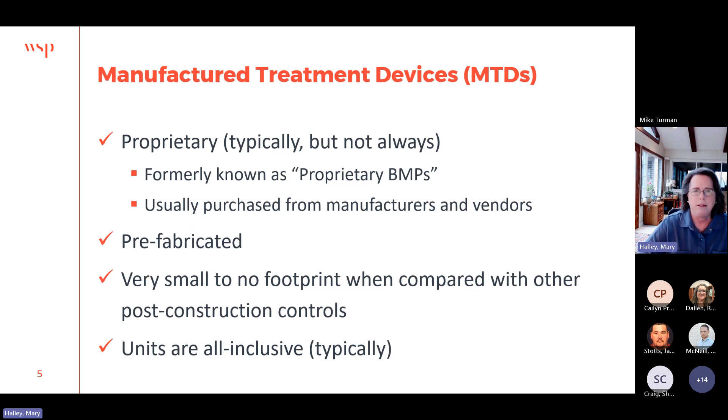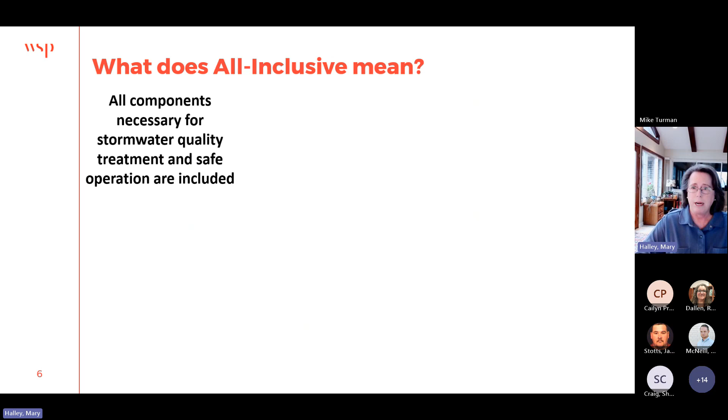These devices are all inclusive typically, and I'll show you what that means. All inclusive, I've defined as all the components necessary for stormwater quality treatment and safe operation of the device are included. Some also do flood control, though not many. But when I mean all inclusive, I mean they have everything for stormwater quality treatment and for safe operation, so they're not going to flood out a space. Safe operation means they can handle the drainage they'll encounter, and they send drainage they can't deal with off safely.

Okay, so when we think about this—excuse my dog if you hear her barking. I work from my house and someone must have come to the door.

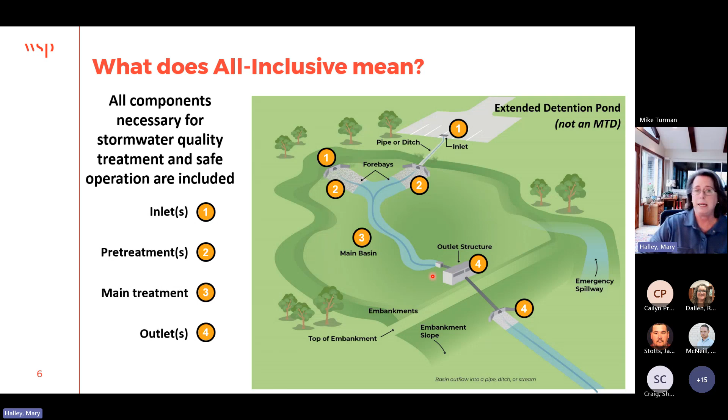For safe operation, we need an outlet structure that discharges the water that's come into the basin in a designed and understandable flow. We also have an overflow—in this case an emergency spillway to the right, where if this basin fills up and we have a deluge, it's not going to spill over everywhere and flood out the property. The spillage goes through a designed emergency spillway and can head out of the basin safely. So that is an all-inclusive practice: inlets, pretreatment, main treatment, outlets, and overflow.

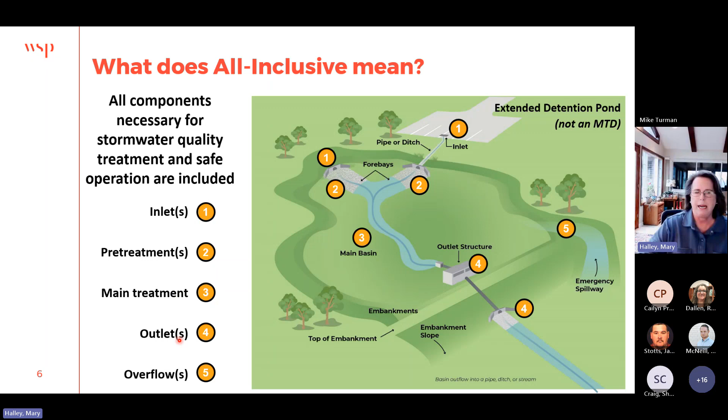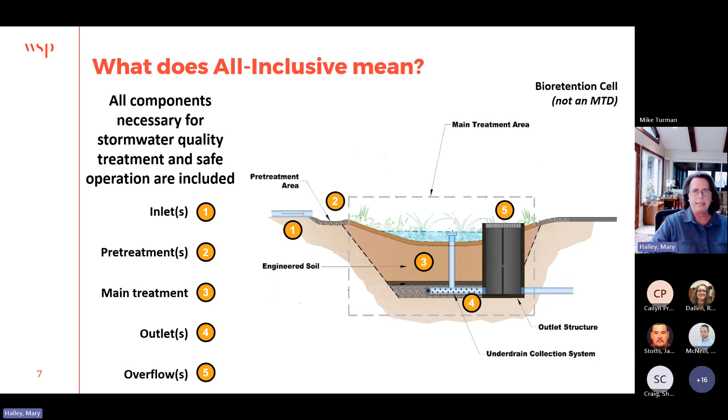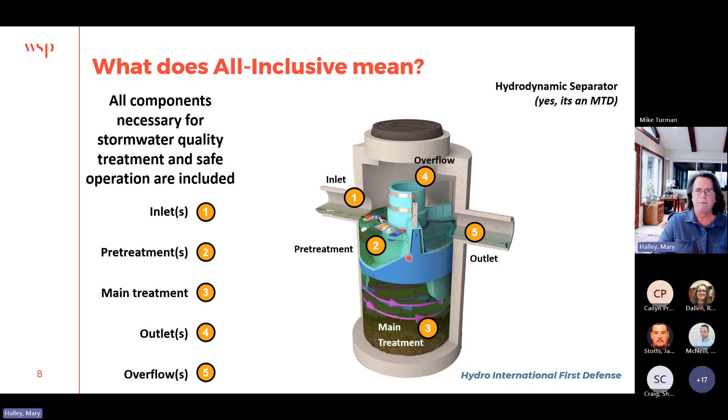Let's move on to the types of manufactured treatment devices. I have a friend down at the bottom of the screen, you can see this name, Jacob Dorman. He works for a manufactured treatment device manufacturer. I think Contech does other things like precast bridges and culverts. I've known Jacob for a long time, he knows a lot about these things, and we worked together on this particular permit here in Tennessee, where the permit has parsed out post-construction SCMs and BMPs into different categories.

And that parsing out, Jacob discovered, fit very well with manufactured treatment devices. I think this shows that manufacturers of MTDs have kept up very well with stormwater quality technology. They've really been very good about adapting to the fact that we've moved beyond a purely pollutant removal requirement into things like LID and green infrastructure. So he's the one that came up with the names of these categories.

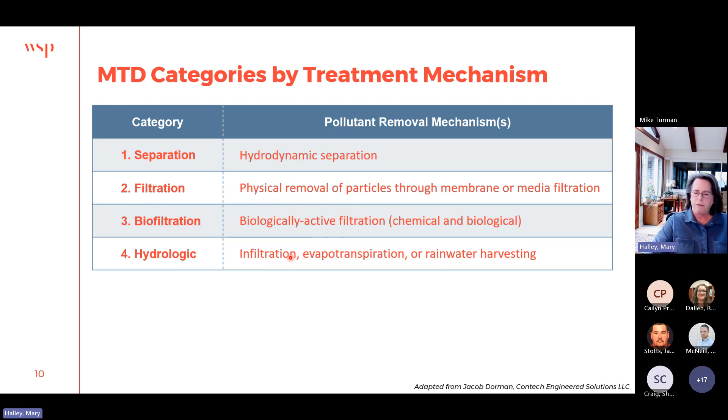I've adapted them a little bit for my needs, but the first category is separation. You're all probably familiar with hydrodynamic separation. The second is pure filtration, where we're just removing particles through a membrane or media filtration. The third is biofiltration, getting into green infrastructure and LID. And the fourth is the hydrologic category, where we're doing infiltration, evapotranspiration, and rainwater harvesting. I'm going to go through all four of these, and Jacob has provided some of the content. I've got his name down here because he's been super helpful.

But the first is separation MTDs. There's a lot of different types of separation, but there can be swirl concentration or some sort of baffling that kind of brings the pollutants apart. Gravity will allow things to settle out and then cleaner water flows out. In this case, this is a hydrodynamic separator, a swirl concentrator. You've got water coming in, it's being swirled around. What the swirling does, if you can see by the circles here, is create a long flow path to increase the efficiency of the unit. The longer you have the water in there, and the more flow path you're sending it on, the better you can separate out the pollutants. So pollutants separate by gravity.

There's a pretreatment device in there that I'll show you in a minute that takes out the floatables. But then you have gravity separation where there's a low velocity flow field and the solids, usually sediment, gradually settle to the bottom. This is a whole lot more 'instant,' and that's why I have instant in quotes. It's not instant as in a finger snap, but it's a whole lot faster than a bioretention cell or an extended detention pond or other non-manufactured controls that usually take at least a day, if not 2 to 3 days, to separate out pollutants from stormwater.

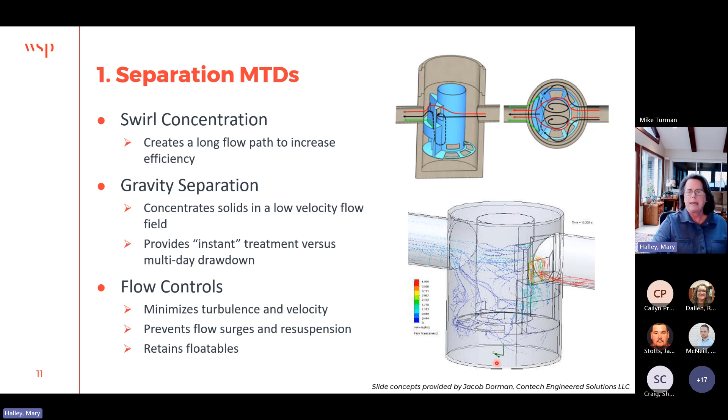So hydrodynamic processes are much faster. In a matter of a few minutes or tens of minutes, you've got cleaner water coming out the other side. Flow controls within the unit minimize turbulence, make sure the velocity is correct for whatever mechanism is being used, and prevent flow surges and resuspension of sediment that's gone down to the bottom. It retains the floatables. Different hydrodynamic units work in different ways, but this one in particular is a swirl unit. You can see water coming in, floatables shown by red and yellow get taken out, and you've got cleaner water swirling around in here. Eventually some settle out to the bottom and out the discharge.

So the advantage of separation MTDs is they're efficient. You get efficient pollutant removal fairly quickly. They're quite durable when they're maintained, we've seen them used for years and years. A lot of times we see them used for pretreatment because they're really good for floatables removal. I have seen these things put upstream of, say, an extended detention pond or a detention pond, so you're getting, at least for that first flush of the storm, floatables removed. They don't even get into the sediment forebay.

There's a number of different applications for these. They're good, but not great for sediment removal, sediment being measured by total suspended solids or TSS. So they're not the highest pollutant removal you're going to get, but when you're low on space and you need something to remove sediment and pollutants attached to sediment, MTDs are a good option.

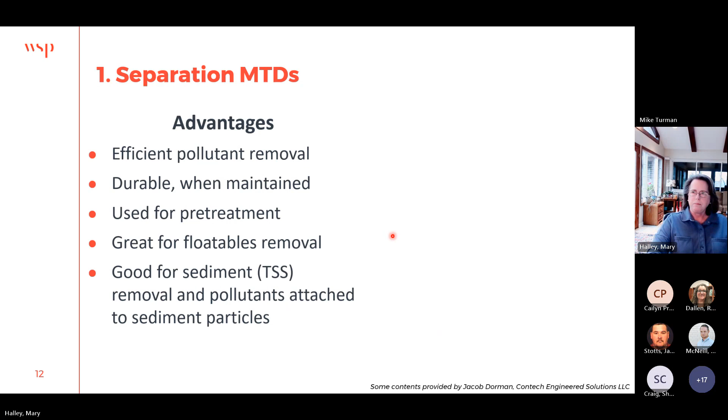The disadvantages obviously are they're not going to remove dissolved and soluble pollutants. And in Oklahoma, in the OKR4 permit, you're leaning into pollutants beyond TSS in ways that many other states aren't yet. It's coming for everybody, but you do have requests and requirements in your permit for TMDLs and impaired waters that go beyond sediment removal. There's metals, there's nitrogen, phosphorus, and other things. You don't see a lot of that in other permits yet, but the MTDs, they're already there in that some of them can do that sort of thing. Separation MTDs, not necessarily, but we'll get to some of the others that do.

MTDs in general have a very high maintenance need because they deal with a lot of water very often, and they're very good at taking out the floatables. So they require frequent cleaning. I put this as a disadvantage because we don't see cleaning get done a lot yet. We're still in a world across the United States where maintenance of post-construction practices is not done very well, even in states that have stressed post-construction for quite a while now.

They're out of sight, out of mind, because they're usually under a manhole or something like that. If a property owner doesn't know about them, they're not going to go looking for them. And again, that leads back to the difficulties in maintenance of post-construction BMPs. Often the owners don't know what's on their property. But at least you can see a detention pond, at least you can see a bioretention area. MTDs, often you can't even see them, so you don't even know they're there. The owner doesn't know they're there.

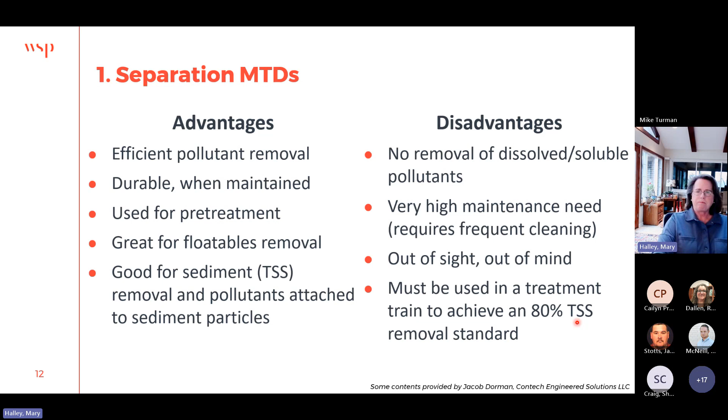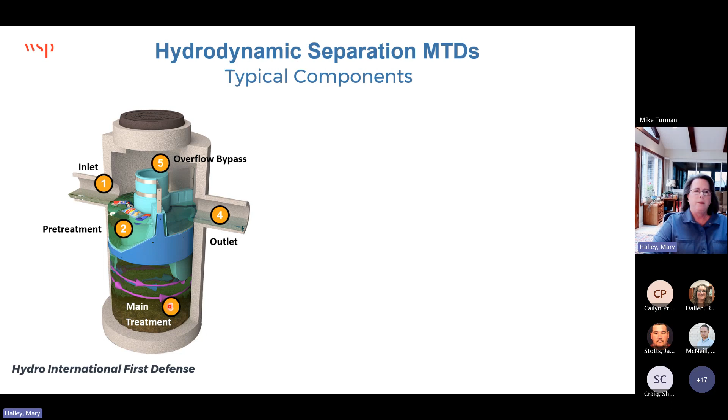More on hydrodynamic separation, the typical components, as I showed before, you've got the inlet, the pre-treatment, main treatment, an outlet, and an overflow bypass. This is what that looks like in the field. Again, this is a rendering or a drawing from Hydro International. The water's going to come off this parking lot, go into this inlet, be delivered to the MTD through the inlet, get swirled around, and cleaner water will go out.

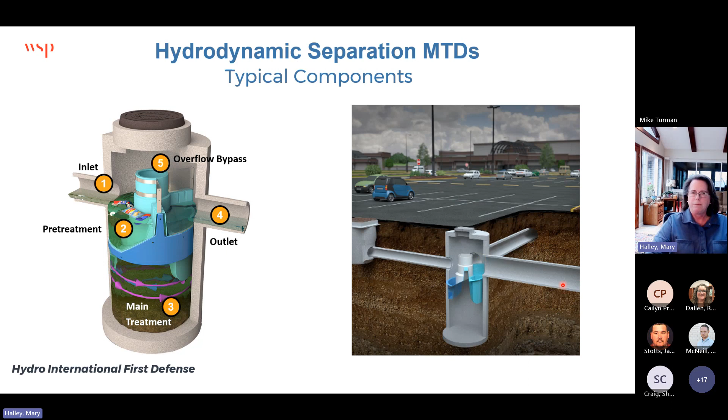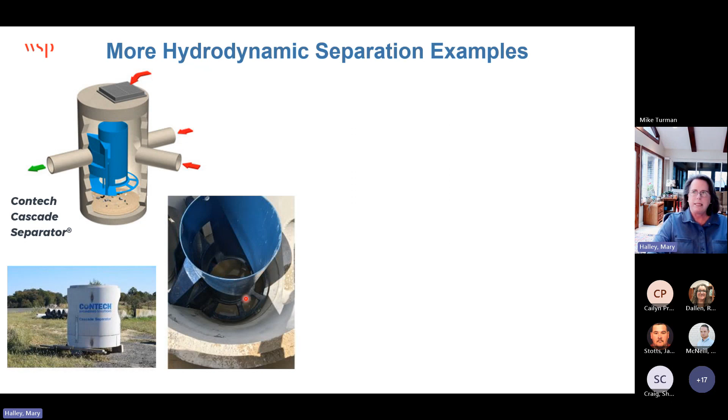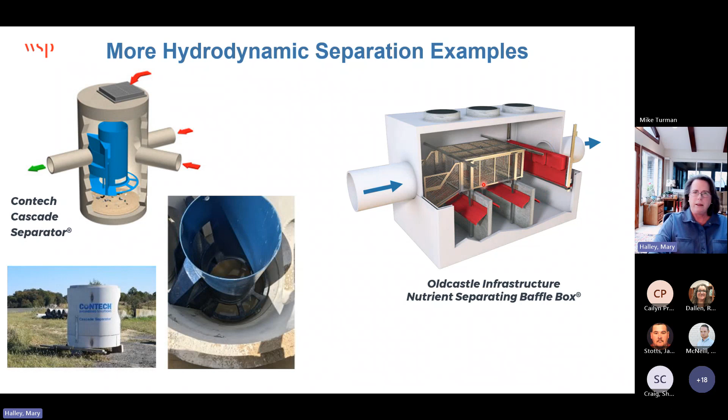So what that might look like, again, through a rendering. This is a little bit different unit. Water is delivered in, leaves and things are captured here. Sediment is captured down here. Cleaner water goes out. There is a bypass in that if this is a screen right here, so if a lot of water is coming in, this thing is overwhelmed, it's just going to pass right through the screen and on out. It doesn't go through all the baffling.

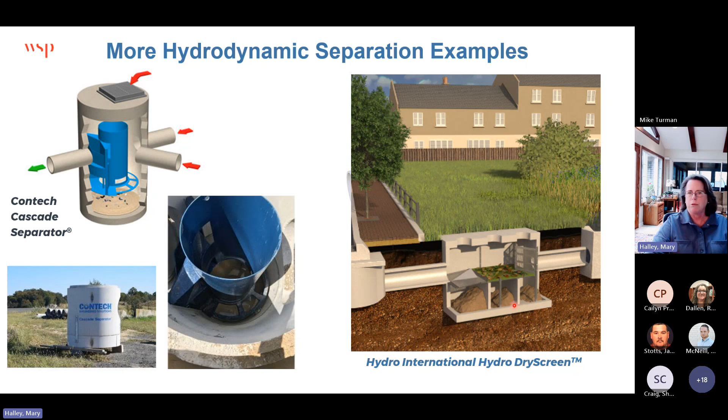But if you Google these things, you can see this stuff can just get caked and caked and caked in these devices until they're full and you can't recognize what's in there. You don't necessarily see bottles and things - you just see this caked goo, dried up substance in there that is very, very hard to remove. So if they're not maintained frequently, they can get bogged down very quickly to the point that they become drainage issues, because they get filled up so much that even their overflow is stopped.

So maintenance is needed. Every post-construction BMP needs to be maintained. The difference with MTDs is they're small, they fill up very fast, they're efficient at what they do, so they need much more frequent maintenance.

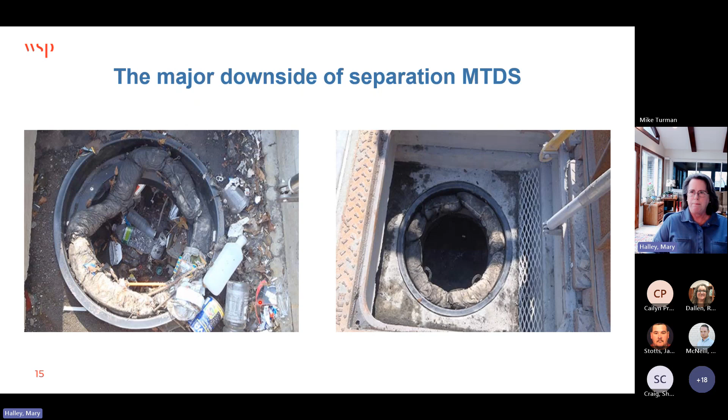Any questions yet on hydrodynamic separation before I move to another type? Not yet. Okay, so the second is filtration.

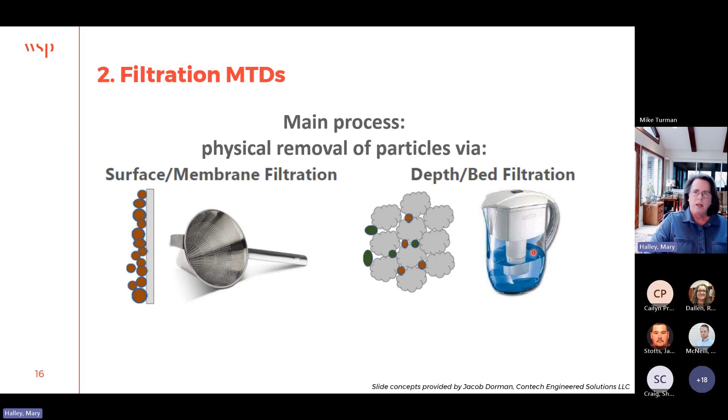So there's inert media and the actual filter screening, or the fabric that's placed over there, that provide barriers to pollutants getting through. The advantages are that they give very good control of solids and attached pollutants - whatever attaches to sediments and solids, like metals and phosphorus, you'll get good control. Again, not great, but good.

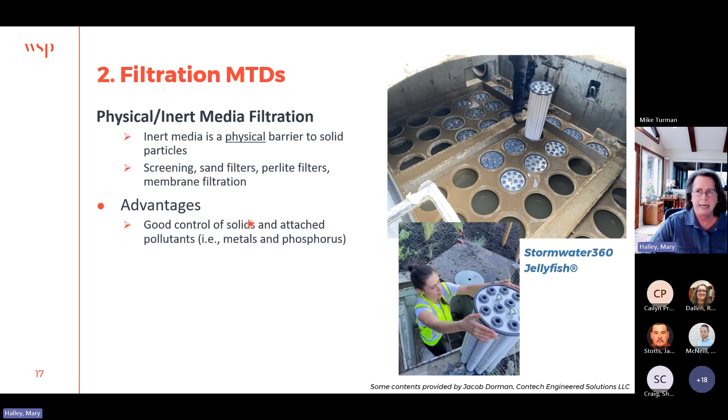One reason for not great is maintenance again. They typically have a very high maintenance need - you've got to replace the filters, you've got to buy them and replace them, you've got to replace the media if the filter isn't messed up. And so their longevity is a concern.

I've had clients with concerns like, what if Stormwater 360 goes out of business and someone has a jellyfish and they can no longer get the cartridges? Personally, I don't know if one company's cartridge fits another company's device, but I've heard that be a concern because you've got to purchase new ones and replace these from time to time. These also typically need to be in a treatment train - again, they're good, but not great.

And one of the problems with these is because you've got media and paper here, there is the potential for leaching of other substances into the water that you're sending out. I don't know much more than that - that came from Jacob, but it was something new to me as I created this presentation, that some folks have discovered leaching of different substances.

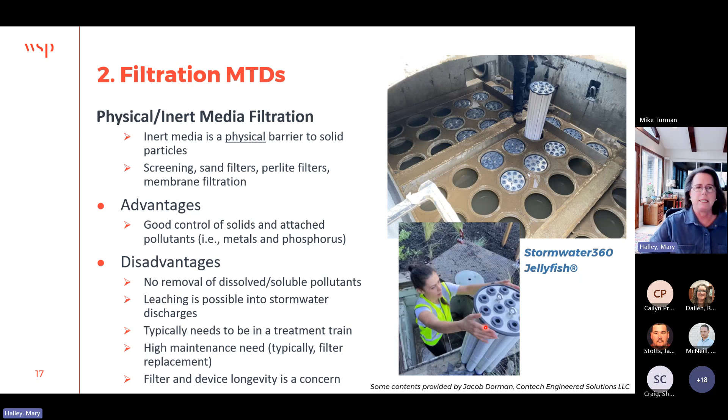That media can act as an absorbent or a sorbent for dissolved phosphorus and other dissolved and soluble pollutants, so you get an additional level of treatment here. There are different media options: activated carbon, zeolite, compost, biochar, different resins and things that work chemically to remove soluble pollutants from the inflow.

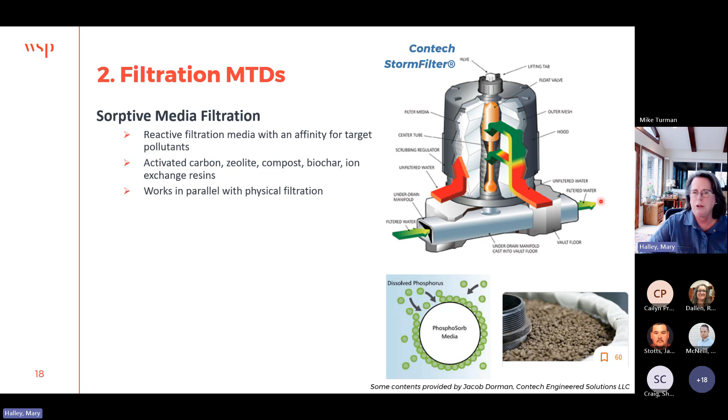This is what that looks like in the field. Again, they look very similar to what we just saw, but these are now filled with sorptive media, and you can choose the sorptive media. So they're very flexible. You can select the media based on the pollutant you have.

And Jacob says this prevents leaching, so you don't have the issue of water coming out with something in it that you didn't intend. It's going to remove those soluble and dissolved pollutants.

Again, this might need to be in a treatment train. It really depends on what pollutant you're targeting. If it's TSS, then yes, you're probably going to need a treatment train. If it's something other than that, like phosphorus, it really depends on what the treatment level is that this can provide. I'll show you in a little bit how you can figure that out.

There is the high maintenance need, and the device longevity is a little suspect simply because they've got to be maintained. If they're not, they can get damaged. And the fact that companies do come and go - Stormwater 360, a lot of the companies I'm going to show you have been around for a very long time. But I don't know that buying these from a company that's brand new, that doesn't have a lot of play in the industry yet, is really a great thing to do.

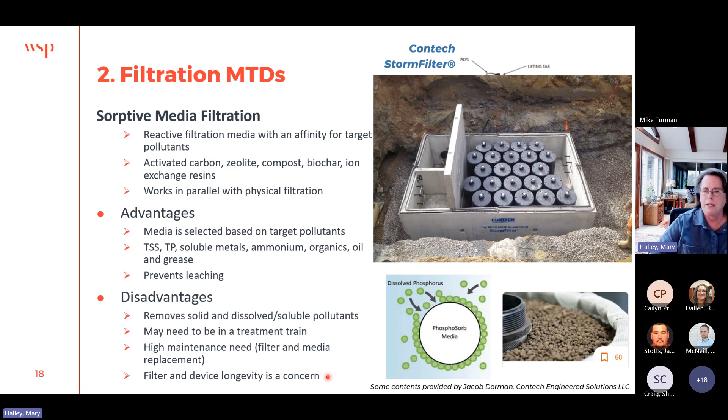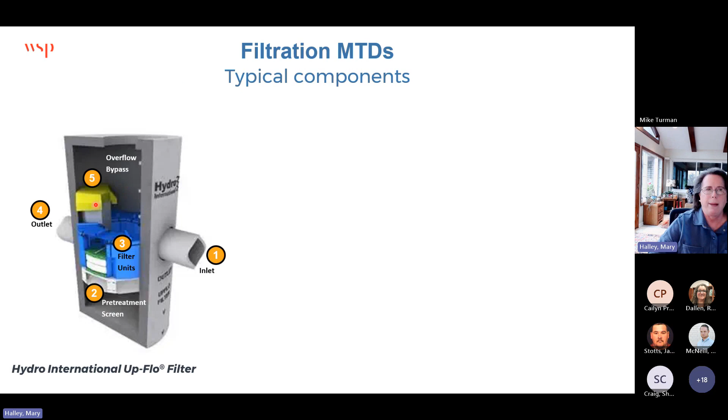So they have all those same components. This is a little bit different where you've got an inlet coming in. The pre-treatment here is a screen - I'll show you what that looks like in a minute - but the water comes in, it goes through this screen. The floatables are captured here, and then it soaks up into the filter unit here, and cleaner water goes out the outlet. This has a little bit different configuration for an overflow bypass. So you can see there's a lot of different ways that these are all put together and they work.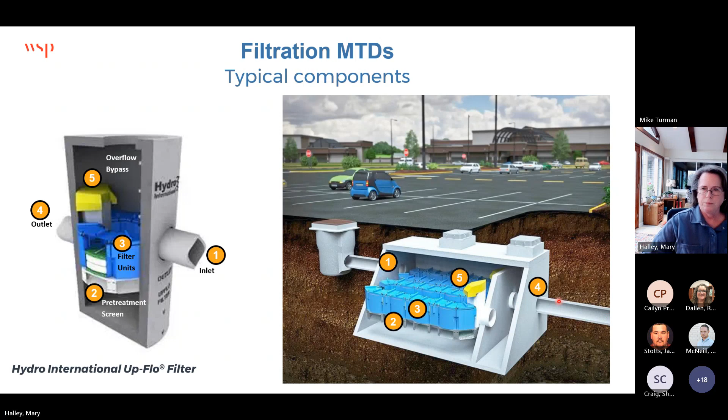More examples of filtration MTDs. I like this picture - we've seen this already, but it kind of shows how that pre-treatment works. Dirty water's coming in, it's going into a pre-treatment chamber where only pre-treated water is then allowed into the cartridge unit area.

Notice how high the walls are here - this is not a lid. If you look at it down here, this is just an interior wall. So this pre-treatment unit's going to fill up, drain into this area where it hits the filtration media, which then drains out into this outlet area. So here's the outlet area and cleaner water going out. Clearly, if this fills up, it's not going to drain into the cartridges - it's just going to go right through, through pre-treatment and on out.

Okay, and that's what this looks like. So again, in stormwater quality, remember we're always treating a very low volume of water. We don't need the 25-year storm to be treated - we're treating something less than the 1-year storm usually. So this low wall will provide pre-treatment for that 1-year storm and let everything else pass through if it gets too high.

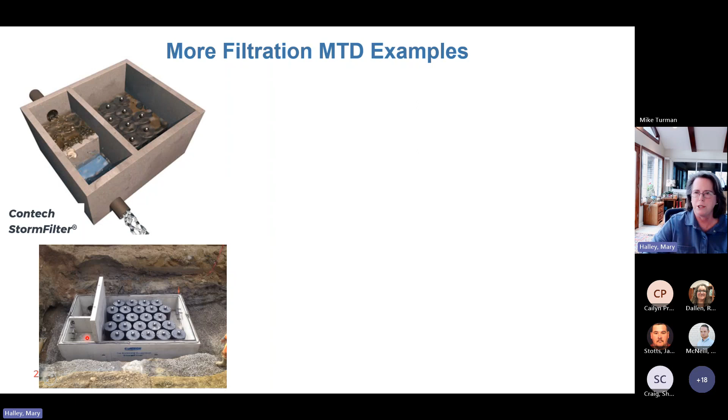So these are new - I hadn't been exposed to these until about 2 years ago. And where you have metals impairments, they create these things simply for downspouts. Okay, any questions on filtration MTDs before I move on?

Yes Mary, we do have a couple of questions. So Jordan asks, with the sorptive media, did you say that leaching is prevented because you can select a specific media that targets a pollutant?

Yes, that's my understanding, because you are selecting a media that's looking for a particular pollutant treatment, you have less propensity for leaching. I also asked, with the sorptive media filtration devices, what is the flow rate through the filter system? And what percentage, or do you have an estimate of what percentage of the stormwater would actually be treated during some of those larger or more intense rain events?

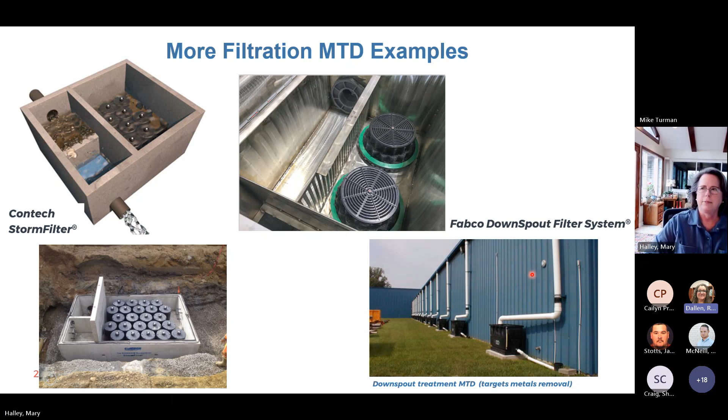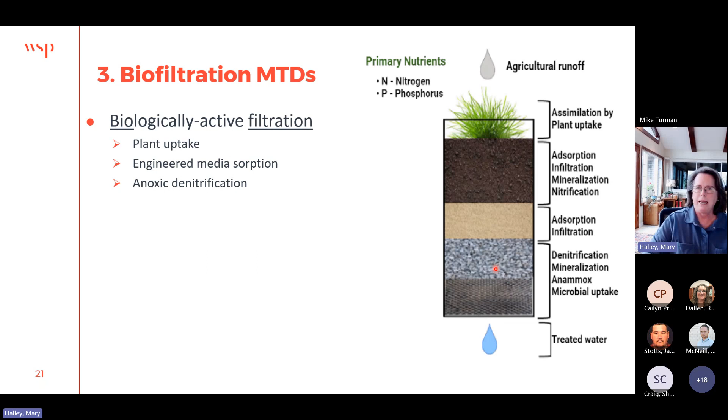So biologically active means we've got plants, sorption, microbial action, and anoxic denitrification.

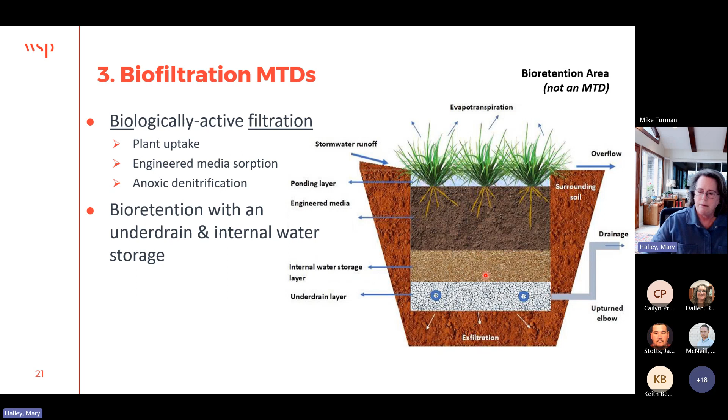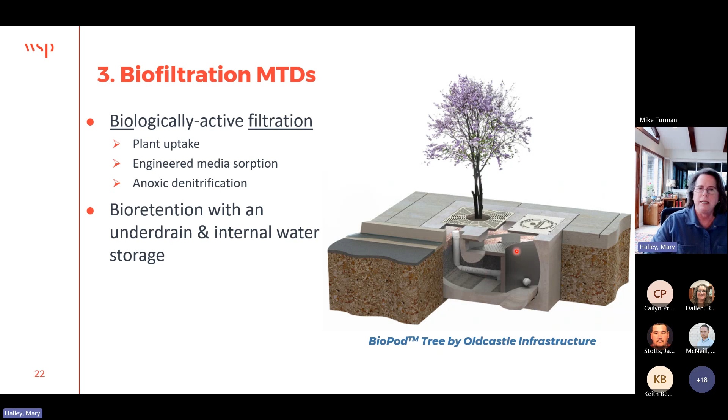I don't have a lot of pictures of MTDs that show that, but that's an important feature of these types of MTDs. So they get great pollutant removal. You don't necessarily have to use these in a treatment train, but you can—they're very flexible. You also have LEED potential.

So if you have a developer that's really trying to do things in a green way, these can get them LEED points. They're very flexible. You can have a lot of different sizes, but they also provide you with aesthetics.

The maintenance, routine maintenance, not remedial, is fairly easy. You're picking up trash, refreshing the mulch, and basic plant care. The disadvantage is you really have to be careful about what you select, and the manufacturer will help you do that for plants because you want to avoid root damage. For trees, the tree is going to grow and eventually need to be removed and replaced. There's a lot of these - you don't necessarily have to use trees, but they are an option for street trees as well as stormwater treatment in the right of way.

And they're really best suited for a clean environment. You don't want to get that engineered media below the mulch clogged up, because then you have a more remedial maintenance that you have to do. So you want to put these in places like parking lots for office spaces or medical buildings, or just places where you're going to have generally a clean environment from a post-construction standpoint.

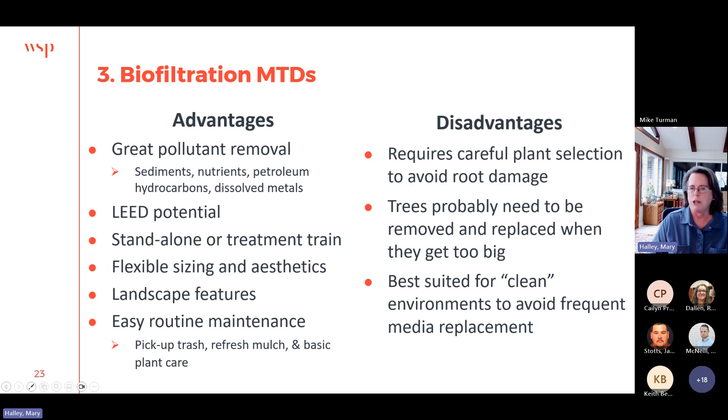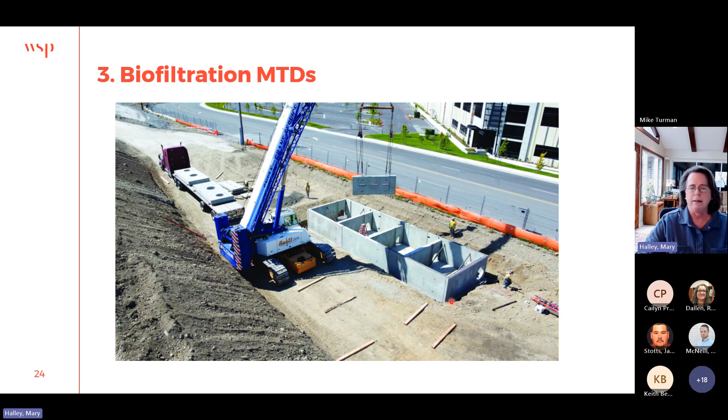So they can be quite large. This is a tree planter that's going in - I don't know where this is, but they can be quite large. You can see there's a ladder inside of here. So if you had to do remedial maintenance on this, that could be quite daunting. You'd have to pop the top off and refill it with all that soil.

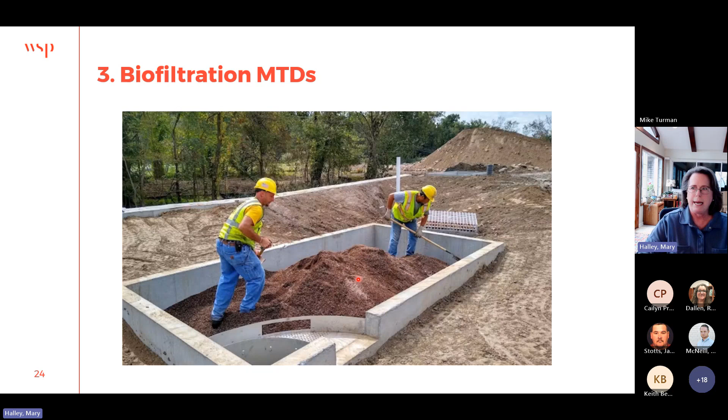This one is smaller. The water's going to come in through this inflow. This is some sort of engineered media that's placed in here, and the plants will go through the top. But if you had to replace this media a lot, that would be problematic. Getting smaller - here's adding media. This particular manufacturer showed that the media needs to spill over so the plant roots will not damage this. The plant roots will have a chance of getting out, and you have a longer lifespan with the plants put into this.

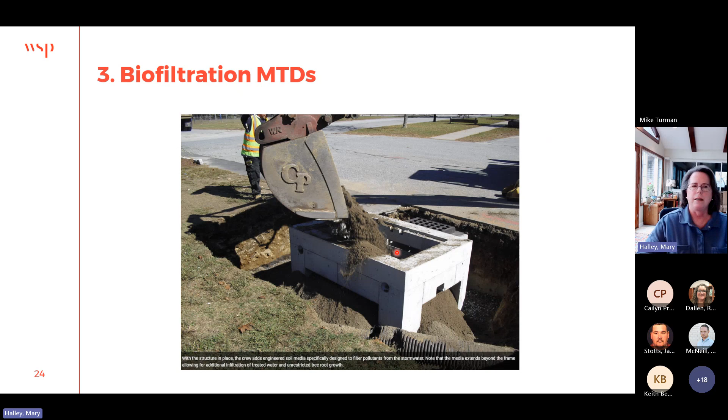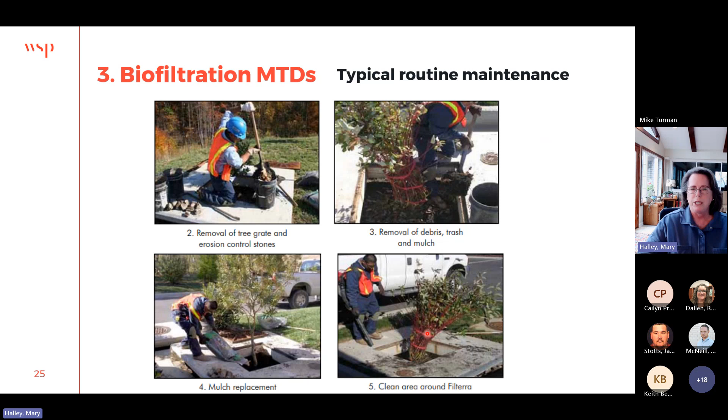And then this is typical routine maintenance - forgive the fuzziness of these pictures, but it's the best I could do. I took out the pictures that showed an inspector with a clipboard. But you're basically popping the top off here, the grate. You're taking out the mulch and erosion control stones, replacing the mulch, taking out the trash, replacing the mulch again, and then cleaning up around and putting the grates back on. So they're not very difficult to do routine maintenance on. You got to do plant care as well, make sure the plant's watered.

They have all the components. There's an inlet. Pre-treatment is provided by the bed surface. Some of these have pre-treatment rock aprons and things like that, so you don't get a lot of mulch movement. It soaks down into the engineered media, down into an outlet with the stone jacket and the perforated underdrain, and cleaner water heads out. There's also a large flow bypass. This one, the bypass is in the bed, where as this fills up, when it gets to the top of this pipe here, the water's going to bypass the entire system and flow out.

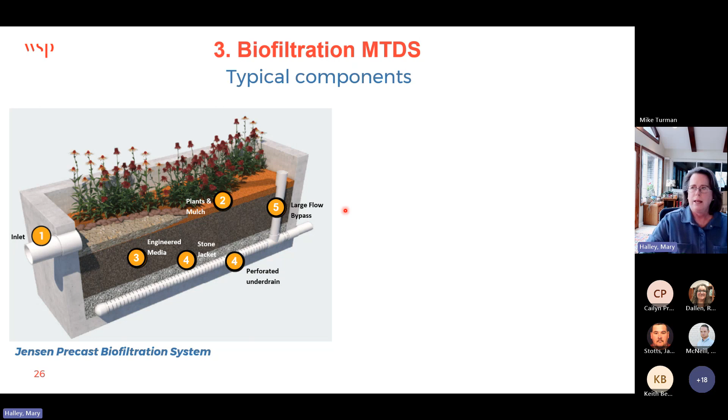That has different ways of showing - I'll show you different ways of bypassing, but this is a different type of mechanism. Same biofiltration MTD, different plants in here. Water comes in through the plants, also through an inlet. Think of this on the edge of the road - a curb inlet's going to let water in. Pre-treatment is provided by the plant bed.

Pre-treatment is also provided by this screen box here that would be easily accessed through the manhole on top. Then water fills up this basin and goes into here and soaks into the engineered media and out through the underdrain. There is a bypass here as water fills this chamber - when it hits this level, it's going to bypass, and there must be another pipe under here somewhere that allows water to bypass this entire thing and head on out.

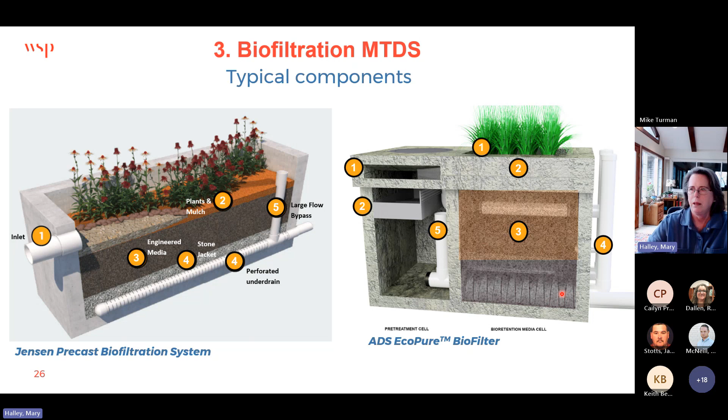Different versions of that - this is the one I showed previously. The bypass, I think, is in here through this pipe. This is an Oldcastle BioPod. This is the same kind of concept, but from Contech, it's their Filterra, and the bypass is simply done at the inlet. So there's stormwater flow - you've sized this inlet to a certain size and velocity, and everything over that goes to a high flow bypass inlet. So a little bit different way of doing things.

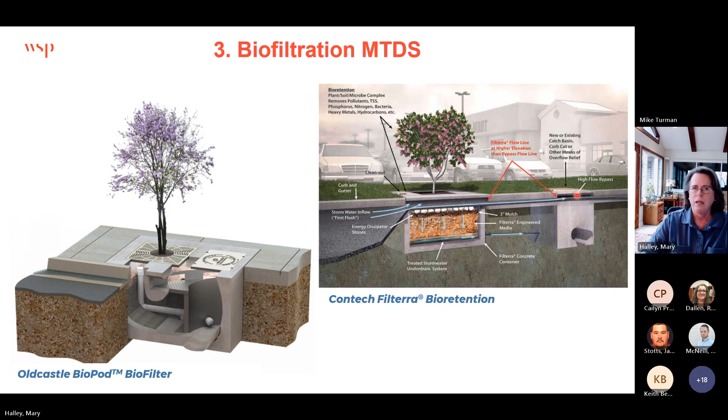They're very flexible. I show you this really to show you the different sizing. This one also shows the upturned elbow under drain, things like that. So there's just a lot of different ways that this can be done. I think they're going to get very popular, because they just seem so easy.

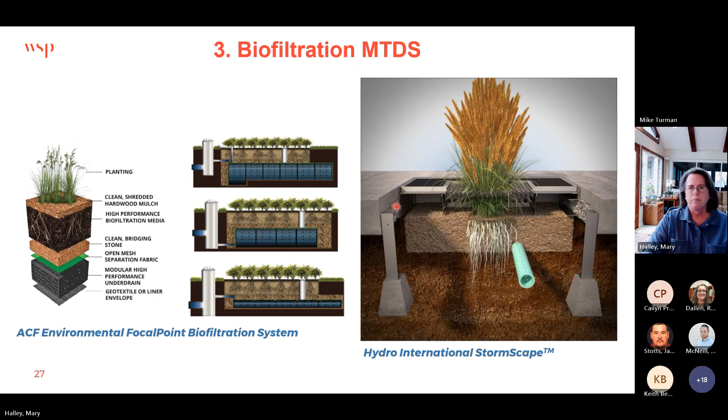Hydrologic MTDs are the same thing, but without an underdrain. They don't necessarily have plants either. We're really just relying on infiltration and maybe evapotranspiration to do the work. They have the highest pollutant removal because you're not sending any water off site. With that water quality storm event, the smallest volume of water you're trying to treat, everything goes down and infiltrates in. The disadvantage is that the feasibility of this is really limited. You've got to have the right soil, you've got to have the right environment. You don't want to have foundation problems or upswelling problems. So I don't see these used very often, simply because infiltration feasibility is something we have to be very careful about.

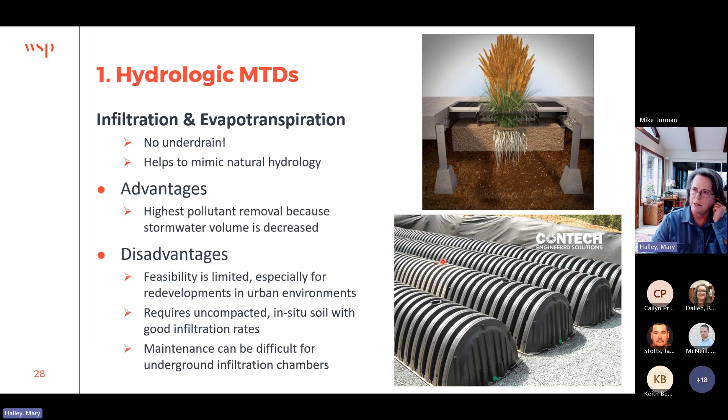The other type of MTD is a cistern, rainwater harvesting. Again, you're removing water from the system—that's why it's a hydrologic MTD. As an MS4, you really just have to be careful, because you've ensured that these are post-construction MTDs. A cistern really has to have a frequent, year-round, and provable use for that harvested water to be used for post-construction compliance. To just say, well, I'm going to water my plants—are they? They probably are, but is that a frequent year-round use? No, that's not. So we're looking for things like it's tied to your toilet flushing system. You use it for something that you have a frequent need for.

And then I worry about what happens when property ownership changes when it comes to cisterns. I might think it's a great idea to have a cistern in my office building to flush the toilets and use for toilet water. Well, a new property owner comes in and says, I don't want to deal with that. They just want a traditional plumbing system. So as an MS4, you have to think about those things, because you have the burden of oversight of these things.

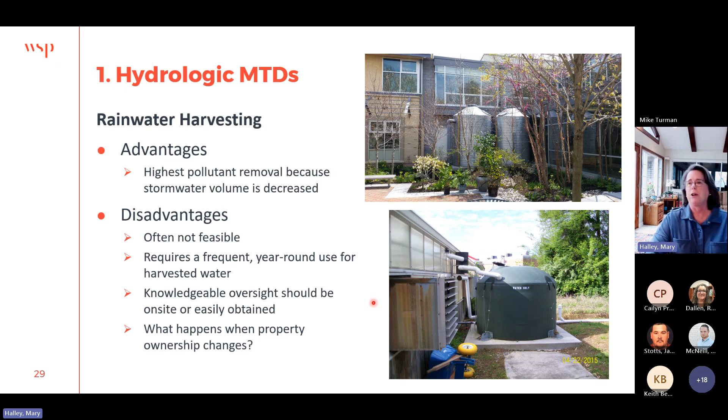You size these things based on a peak flow. Most other post-construction BMPs are sized by volume, but MTDs are sized by a flow rate. And you want to get the maximum flow rate that these things are going to encounter for the design storm—again, small storm events, so we're talking about the 1 year storm or less. But you want that max intensity, because you want that max peak flow. So it's very much like a rational method equation here.

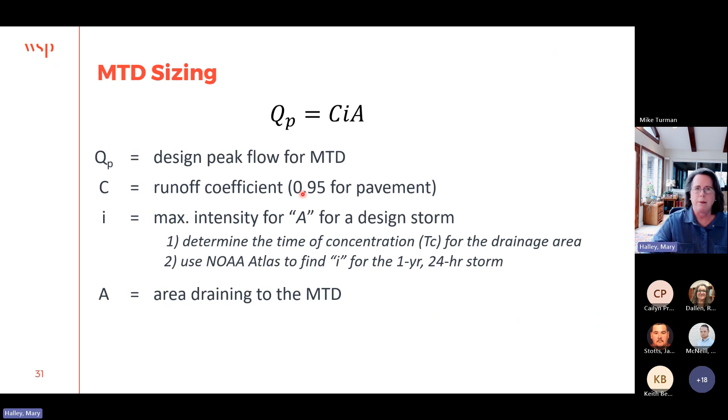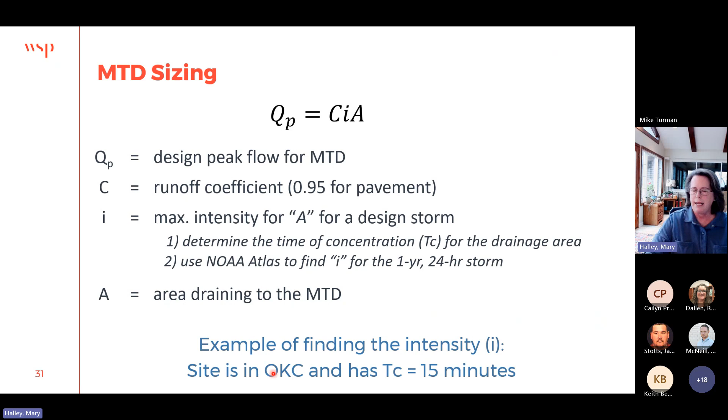You want it to capture only pavement. So to find that max intensity to put in this equation, let's say our site is in Oklahoma City and it has a time of concentration of 15 minutes. We would go to NOAA Atlas 14. Let's say the 1 year storm is our design event. With a 15-minute time of concentration, our max intensity would be 0.747 inches per hour. We're not really sliding up into a recurrence interval that's larger than a 1 year event—that's just not what we do for water quality. I'd say the highest would be 2, but we're not trying to handle the 5, 10, 25 year event with these things. So they're not huge, unless you have a huge site.

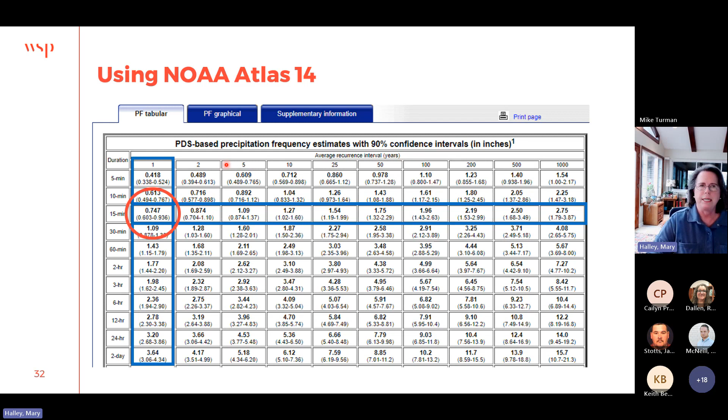As far as pollutant removal percentages—how much TSS or phosphorus it removes—we use an industry-wide standard. Back in the day, when these things first came out, it was problematic, because manufacturers would say it works because we say it works, and they had their own data to kind of show that. But as an MS4 who has the burden of compliance with a state or federal regulation, you need to be able to show that, yes, we know that it works. If it's built in this way, we know that it works. And you can't necessarily rely on the manufacturer to say that. So it was almost like we were in a snake oil salesman situation back then.

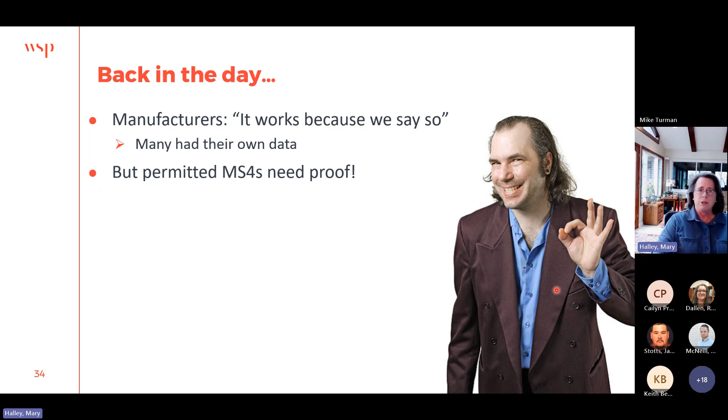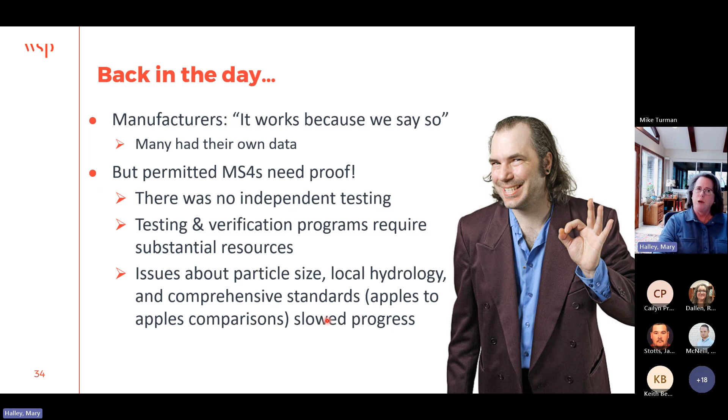And there are a lot of great manufacturers out there. But it came down to MS4s having a liability—they needed to know. There wasn't any independent testing. Testing and verification require a lot of resources. And there were a lot of technical things that got bound up in everyone's mind on how to do this, which kind of slowed progress. So over time, what we decided we needed was industry-wide standards. There's not a national program yet, but there are two programs in the US that are used by many, many states to be able to say we can rely on this device and it provides a certain level of treatment.

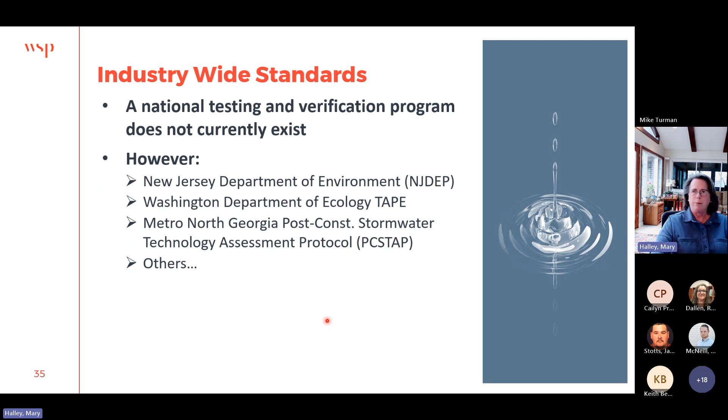Those are from New Jersey and Washington. If I have time, I'll talk about Georgia, but I'm not going to do that. I probably won't have time.

New Jersey Stormwater, NJDEP, New Jersey Department of Environmental Protection, their regulatory agency in their state, has a certification. Their certification addresses all types of MTDs. We don't need to address the hydrologic ones because they're not discharging water.

We just need to address the types - separation, filtration, and biofiltration - that send water out the other end. The definition in NJDEP's protocol generally follows what shows up in permits across the nation. They use the New Jersey Corporation for Advanced Technology, or NJCAT, to do the independent lab testing and verification. It's only in a laboratory, so we've taken geography out of the equation.

NJDEP does a lot of testing to certify a TSS removal rate. So it's only TSS, and they're only going to give an 80% TSS removal or a 50%. If they get an 80%, generally you can use that as a standalone MTD. If it's 50%, you need it in a treatment train, more than likely. It also specifies a maximum treatment flow rate that pollutant removal is good for, so you've got some context around that pollutant removal number.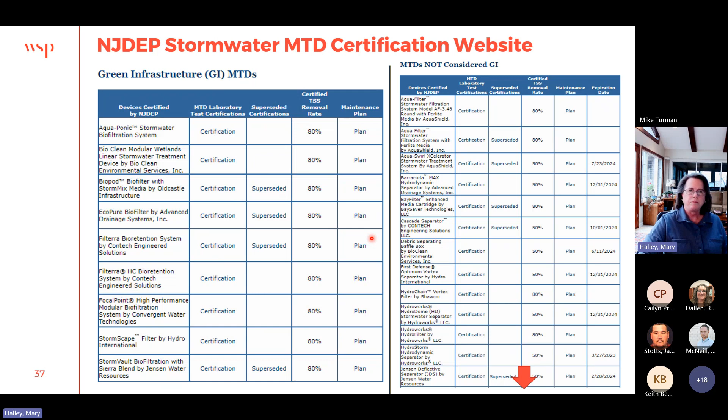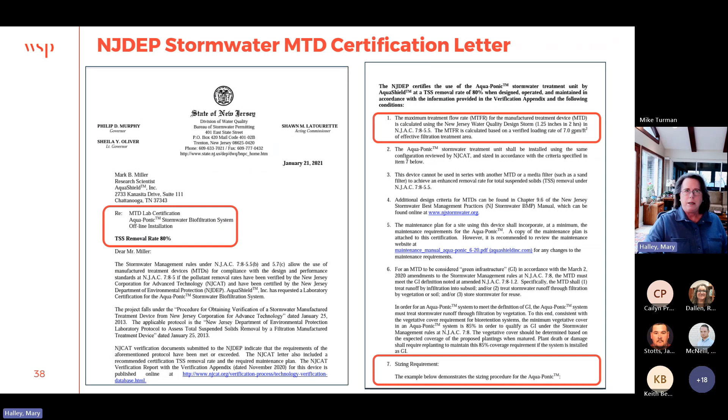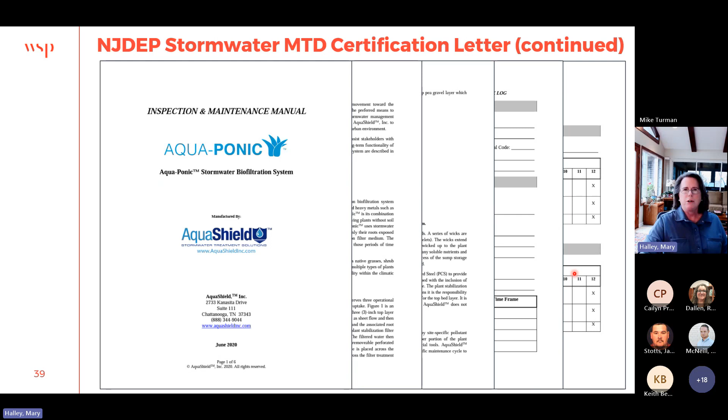But you would click on the certification, and a letter comes up from the state of New Jersey DEP that shows the TSS removal rate as certified by NJCAT or as determined by NJCAT, the maximum treatment rate, flow rate for that TSS removal, as well as sizing information. Another nice thing about NJDEP is you can click on these, and they also have the inspection and maintenance manual that comes from the manufacturer, which is golden. That's fantastic. Ask for those with every plan that you get that has MTDs in them. It's a really nice setup that they've got.

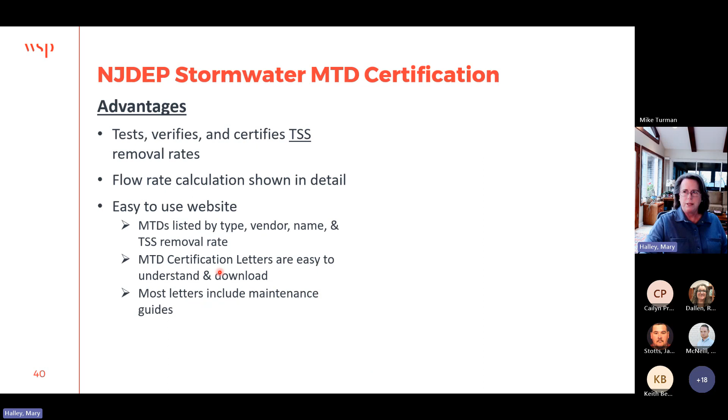The advantages are you've got this good solid testing protocol. You've got a flow rate calculation that's shown in detail, and you've got parameters around that TSS removal rate that they give. Their website is super easy to use - I did it, and I'm not that great on websites, so it's no problem.

Disadvantages are it only addresses TSS, so we've got a limited pollutant there. The flow rate doesn't translate outside of New Jersey, so it's a guide only. You've got to write policies around how to use that. And then there's a lot of code references and things that are pertinent to New Jersey, but not really relevant in Oklahoma, that you just kind of have to get around.

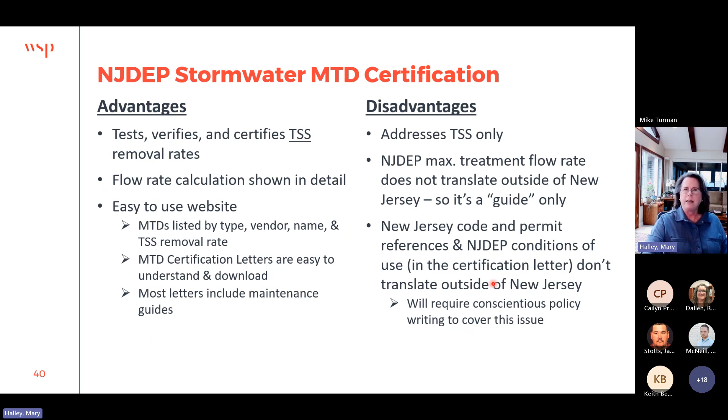Washington TAPE - this is the state of Washington, has a TAPE program, technology assessment protocol. It is just as good. It goes beyond TSS removal and goes into phosphorus, oil, copper, zinc, metals, things like that. It also does field testing, not that that's important from Washington to Oklahoma.

It has different uses. So there's a general use, which means it achieves treatment goals. A conditional use means more testing. A pilot use is where the vendor or the manufacturer and the developer are agreeing that, you know, we don't know about this one yet, but it passes on certain things.

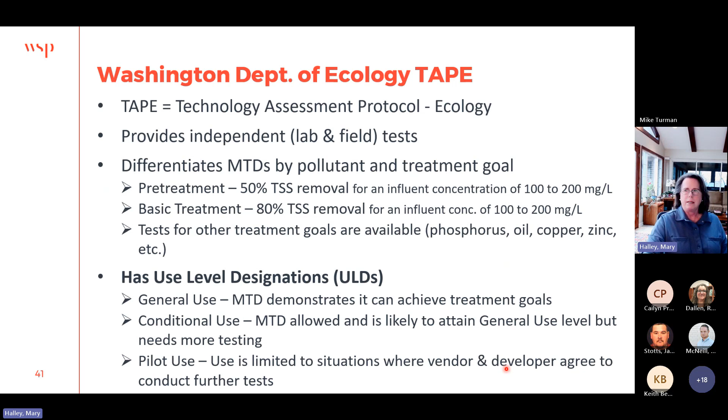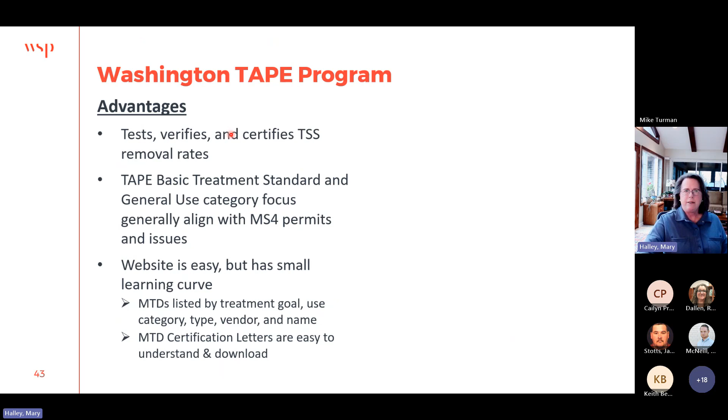Again, they've got a website. It's a little bit more involved to deal with, but you're clicking on the device you want to look at, and you get that letter that comes up. This had the advantage of addressing more than TSS, but it still has some of those disadvantages in that it's Washington and things don't necessarily translate over.

What most states are doing are translating over the TSS and the max treatment rate that goes with that TSS removal, or goes with that other pollutant removal - the treatment rate, flow rate, and the pollutant removal - and then writing policies around how to use those things. But you've got the backup of having testing protocols, so you can go to your state regulator and say, we know that the MTDs that are put into our MS4 work.

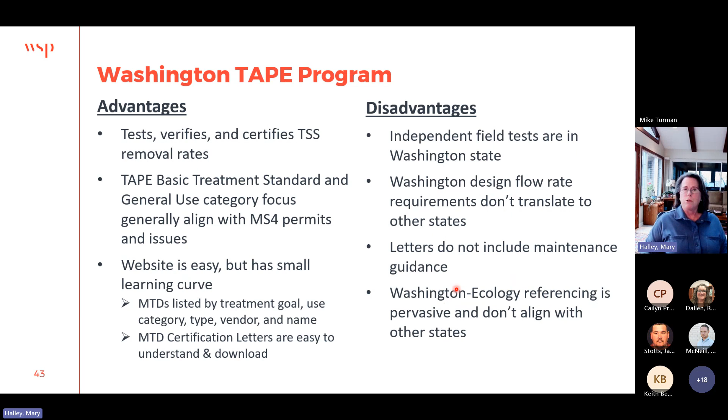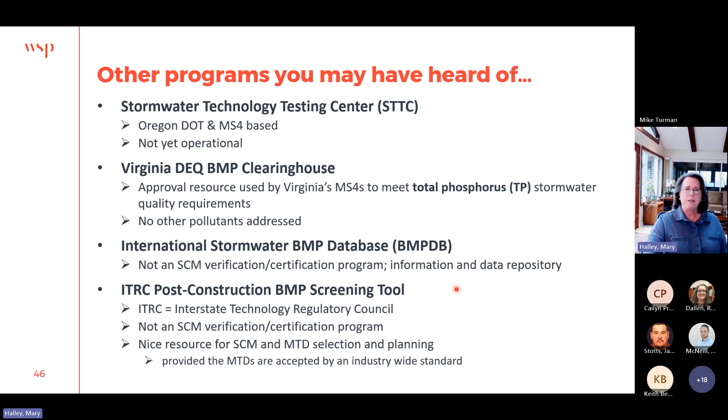I'm not going to go through Georgia. It's not really got anything better than New Jersey and TAPE. There are other tools out there that for various reasons I don't recommend - either they're very limited or they're not actually testing anything, they're just giving information. So New Jersey and Washington right now are the good ones.

There is a National Municipal Stormwater Alliance that is trying to come up with a national testing and verification program that I think would be very interesting for Oklahoma. It relies on a lot of different partners to buy in, so that's being worked on. There's donations they're taking. I think it has a lot of groundswell of opportunity. So keep an eye out for that.

So crafting local policies - I'm coming down to an hour here, and this is my last slide.

Allow only those manufactured treatment devices that are backed by reputable independent results. Don't go back to the snake oil salesman scenario. There are a lot of fantastic manufacturers out there that have very good products.

There are new products that will come online. I saw one at the LID conference in Oklahoma City just last year that looked very promising. It's a big step for these guys to get a product out there and go through NJDEP and Washington TAPE to get certified. If they've gone to that level, I'd say they're probably a pretty reputable company that you can stand behind, and they can stand behind what they're putting out there.

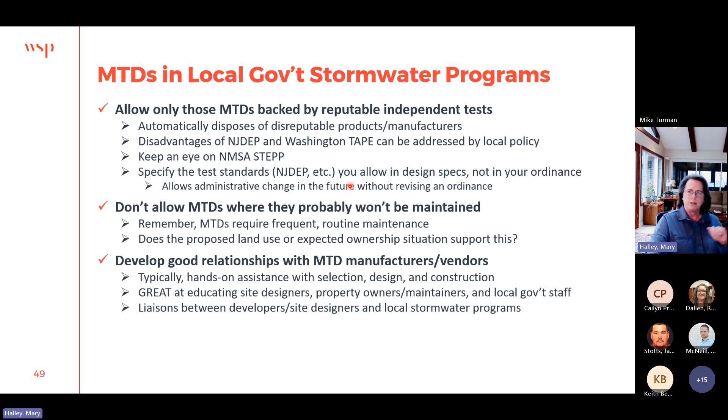Develop good relationships with MTD manufacturers and vendors. They are fantastic. Now, they do have a sales piece to what they do, but they're very knowledgeable and very hands-on. A lot of times they help with selection, design, and construction. They're great at education—they can tell you far more about these things than I can. They're generally very willing to come in and give seminars like this, but in much more depth about what their products do. They're great at educating all different levels of stakeholders.

I've seen them work very well as liaisons between a local government plan reviewer and a developer on a site design. They really can be very good. And then I would suggest that you pilot these things by using them on your own properties.

Municipal local governments tend to have the equipment on hand to maintain these things, and they also have the people who are getting paid to maintain them. The best way to get to know them is to put them on your own property and begin using them—seeing how frequently they actually need to be maintained in your situation, your topography, your geography—so that when you see these on private properties and have to oversee their maintenance, you know what you're doing.

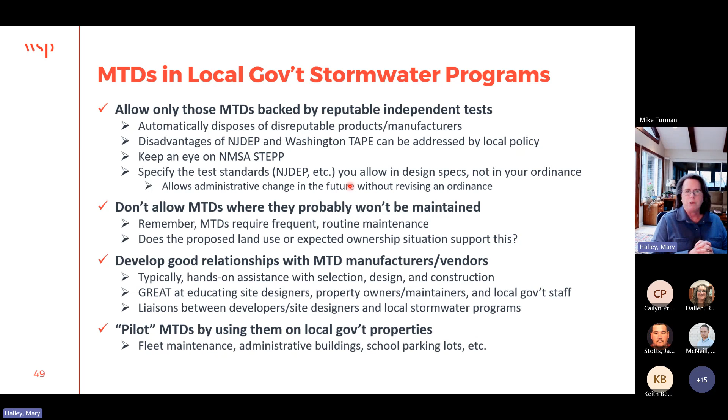So I am two minutes over. I didn't leave much time for questions, but I have time to sit here and answer them if folks want to ask. I apologize for the length of time I went over.

Oh, that's fine. I think we did lose a couple of people, but sometimes people have other meetings they need to get to anyway. Mary, that was a wonderful presentation—gosh, I learned so much. Thank you so much for your time.